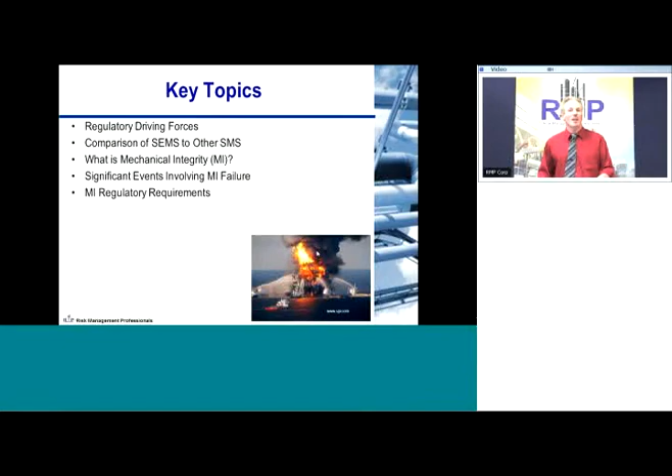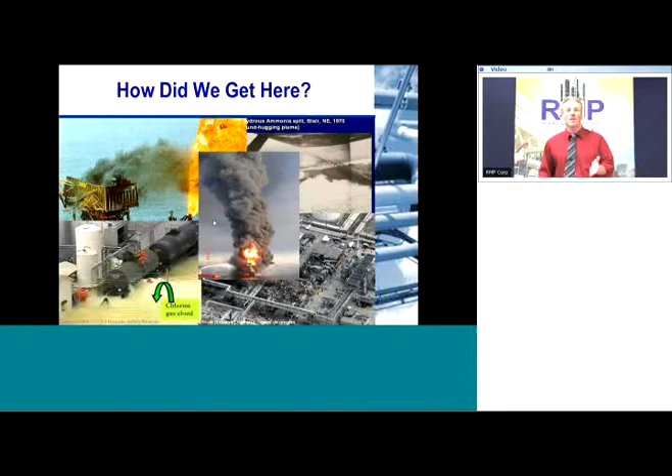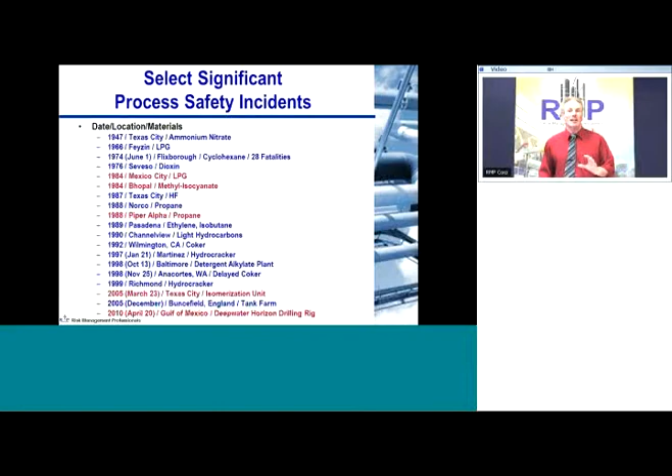I'd like to start out with talking about what's driving this. Basically, there have been a number of tragedies over the past decades that have really awakened safety professionals to the importance of their job and the need for good quality work and for very complete safety programs. When you look at a lot of the significant events over the past few decades, the items highlighted in red, 1984 Mexico City, Bhopal, India, 1988 Piper Alpha tragedy, 2005 Texas City, and last year in the Gulf of Mexico with the Deepwater Horizon accident. All these things were pivotal events that triggered the development of various types of regulations.

Again, what I want to do is lead up to an understanding of what mechanical integrity is, what the regulatory requirements are, and what are the resources you might have to very efficiently develop your program. One of the things to keep in mind is that mechanical integrity and a lot of these other elements of safety management systems come out from observations and investigations of previous accidents. I mentioned those four pivotal process safety events that have really driven the development of regulations.

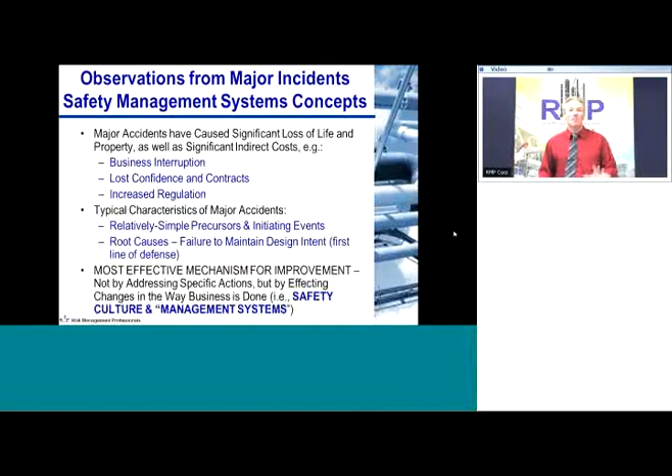When you look at all those different process safety accidents that have caused major business interruptions, lost confidence and contracts, increased regulations, when you drive down to what the root issues were, you realize that they're relatively simple precursors and initiating events. It's not a misunderstanding of the laws of physics, or radical new technologies that we didn't understand the effects of. Root causes were typically the failure to maintain the design intent. And a lot of that design intent is encompassed by the mechanical integrity program. So when you look at those failures, people realized the most effective mechanism for improvement was not really by addressing specific actions, but really by changing safety culture and the development and implementation of management systems.

I've been involved in this business since the mid-'80s, and I've also served on the technical steering committee of the CCPS at that time. And I've watched the development of various regulations, often as a result of tragedies, up to the current day when we're looking at offshore facilities and the SEMS program.

And when you look at the mid-'80s, when there was a technical management guidebook developed for managing process safety, and you look at the key elements there, and you look at what's in the SEMS program now, and also for onshore facilities, process safety management, and also risk management programs, you really don't see a lot of differences in terms of fundamental concepts, the fundamental elements that need to be managed.

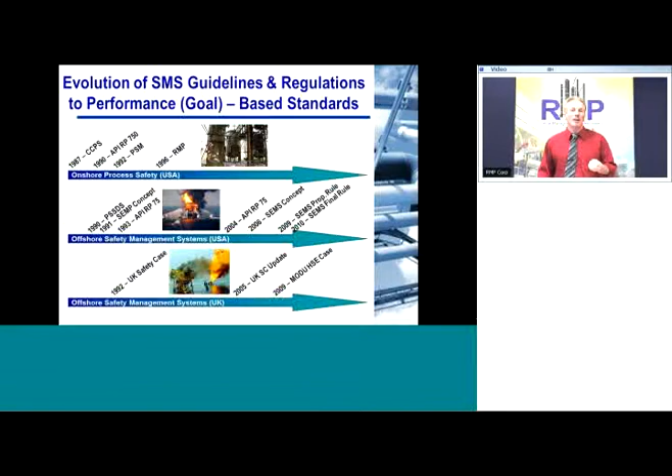And over that time period, you've literally had hundreds of safety professionals looking at that, and that relative consistency, even though there are differences in some elements, that general consistency of all those different requirements really hones in on the fact that these are fundamental elements for having a good program that manages safety. So what I'd like to do is make sure that there's a good understanding of how SEMS compares to some of the other programs that are out there.

When you look at the different SEMS elements, safety and environmental information, hazards analysis, management of change, operating procedures, safe work practices, training, mechanical integrity, which is what our focus will be today, pre-startup review, emergency response and control, investigation of incidents, auditing of the different program elements, and also documentation requirements. When you look at all those, again, these are very similar to the elements of other programs that are out there.

Doing a good hazards analysis to understand the basics of your needs for the programs. Managing change, because there's all sorts of things that are happening at a lot of facilities, and the importance of keeping control over that and understanding the impact of those changes. Operating procedures, so that you have consistent best practices in terms of how you operate those facilities, and also mechanical integrity, maintaining the functionality of key equipment, both equipment that's in normal operation and also equipment that may be on standby for key safety functions.

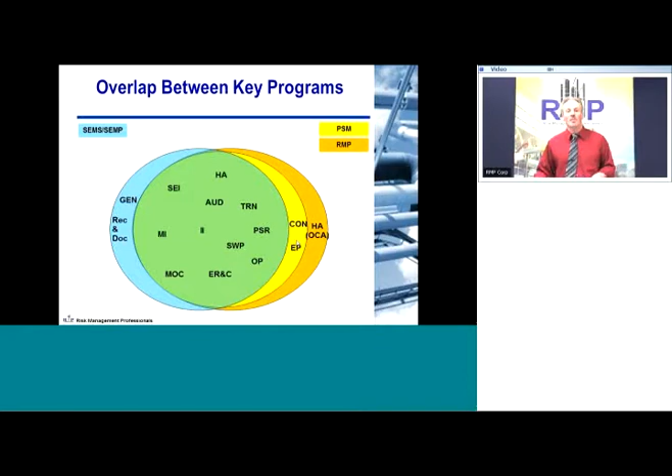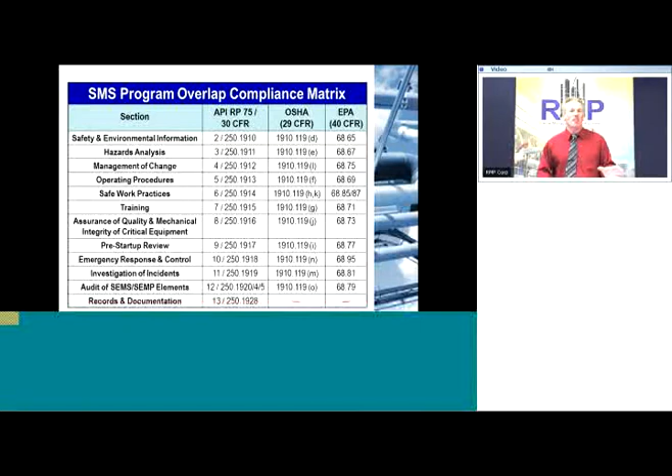So let's get to the meat of it. I'll be cycling back to why I was talking about that overlap in a few minutes. But let's get into some of the details for what is mechanical integrity. Just to make sure we're all on the same page, mechanical integrity from the Chemical Manufacturers Association, basically the fundamental premise was process equipment that is properly designed, fabricated, installed, and operated should provide reliable service if it is adequately inspected, tested, and maintained over the life of the facility.

The key thing there is reliability. You want reliability not only for your operating equipment to avoid process excursions, but you also want key standby equipment for safety to be functional when needed.

A lot of safety equipment just sits there forever, and people don't pay too much attention to it, and they really don't know if it works or not unless you're testing it or somehow verifying its functionality. And I'm now going to get into some examples of that.

I've seen some really interesting cases when I've been at plant sites and you walk around and you notice a key safety feature disabled in pieces on the ground, and you ask, oh, why is that device in pieces? What are you doing to it? And the reply is, oh, it's been like that for months. It never comes on anyhow, so we just figured we could leave it disassembled and keep it a low priority.

Whether it's active equipment or standby equipment, things that are critical for safety are necessary to maintain their reliability, and that's what mechanical integrity is all about. And we'll be talking a little bit in terms of ways to do that effectively, identifying critical equipment and finding ways to help manage the reliability of it.

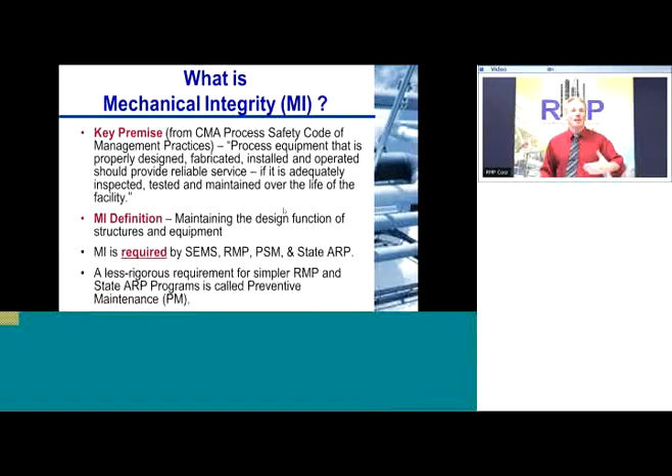Now, you'll also hear another term, preventive maintenance. Preventive maintenance is one element of mechanical integrity, and for some of the simpler onshore risk management programs and state accidental release prevention programs, that preventive maintenance requirement is a stripped-down version of mechanical integrity designed for simpler facilities that represent a lesser hazard.

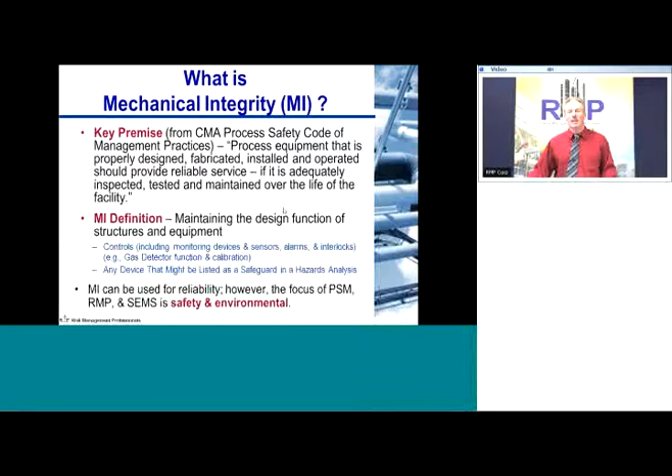Preventive maintenance, again, is a key component of mechanical integrity, but the other elements of that, not just maintaining and preventing equipment from failing, but also some sort of inspection, testing, and repair of equipment. Once it's out of service, how long can it be out of service before it's repaired, and how do you repair it safely? All those are elements of mechanical integrity. Mechanical integrity can apply to any type of device or structure. I'll tell you how to identify those in a few minutes.

However, for regulated facilities, things that tend to come into these programs frequently are tanks, pressure vessels and piping, blowout preventers, pressure relief systems, emergency shutdown systems, rotating equipment, various control devices, and also active and passive protection features, and really any device that might be listed as a safeguard in a hazards analysis. That's one of the key indicators for what you need to cover by your mechanical integrity program.

If you've done a hazards analysis, a lot of people use the HAZOP approach for that. And if you need any background on that, we've got recordings of previous webinars on hazards analysis that we can send to you. Those exercises, the HAZOP study that lists the safeguards, if you've listed it as an important safety function, certainly you need to somehow assure its reliability.

If you've identified an initiating event as something that can trigger a potential process upset that causes problems, certainly that needs to have some sort of pedigree associated with it and somehow be encompassed by your mechanical integrity program. That doesn't mean that all equipment and all items need to be addressed with the same priority, but you'll want to understand the importance to safety of that device and your programs for maintenance, inspection, testing, and repair around that.

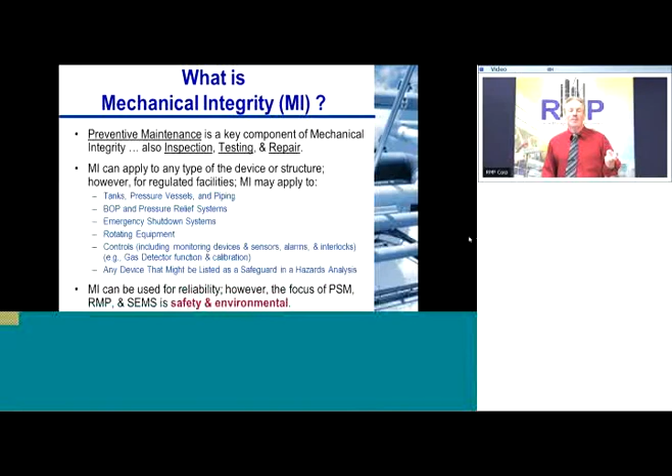Mechanical integrity can also be used to improve the reliability of your facility and, of course, operability and profitability. However, the focus of all these different safety programs and what the regulators are looking for, of course, PSM, RMP, and SEMS, is the safety and environmental issues.

So let's talk about some examples of mechanical integrity problems that have occurred and the sort of things that people look for. When you're looking at different events that have involved mechanical integrity failure, many of these basically have caused the formulation of safety management systems regulations, and a lot of these failures have been rooted in mechanical integrity snafus, if you may, things that haven't gone right, deficiencies in the program, vulnerabilities with respect to how people have applied these best management practices. And when you look at these accidents, not only does it give you an example of the importance of mechanical integrity, but also the kind of things that can go wrong at facilities.

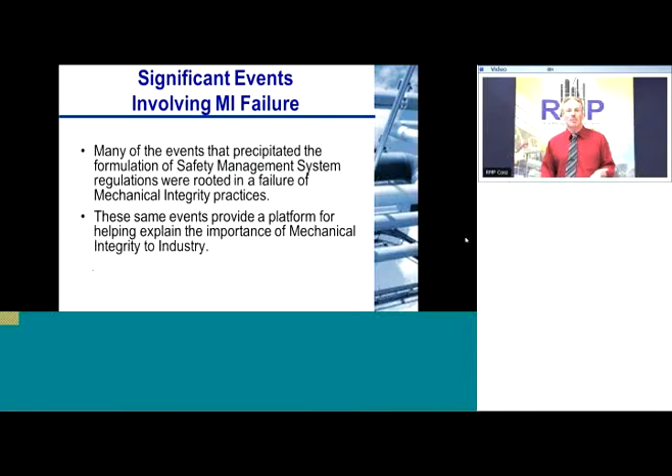When you look at the Flixborough event in 1974, basically it was a temporary bypass that was fabricated in the plant, never designed for that service with the temperature and pressure environment and the thermal cycling associated with the reactor. And there may have been some alignment issues associated with its installation. All those things contributed to the fact that it was not suitable for service, and eventually it did fail and resulted in 28 fatalities.

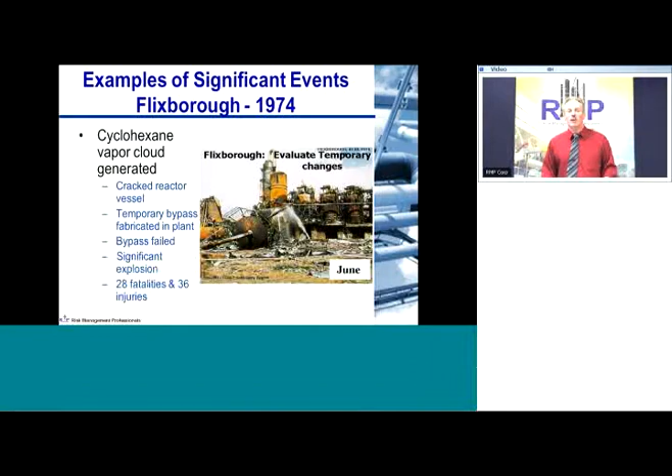When you look at a lot of the tank fires that have occurred over time, a lot of them are rooted in the failure of the level indication systems and also the safety alarm systems, a fundamental thing that would be covered by a mechanical integrity program.

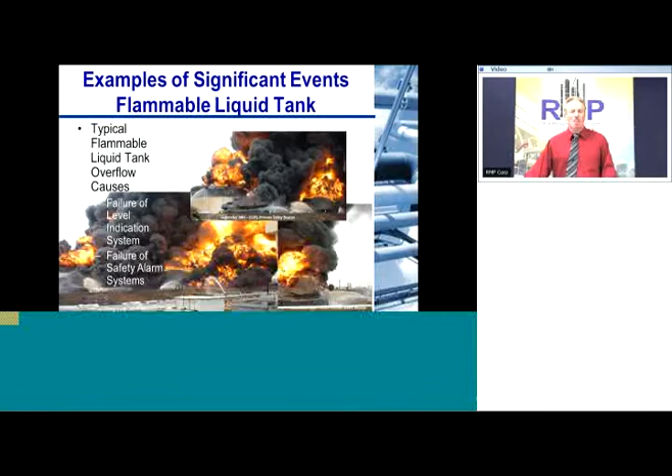When you look at the Texas City event in 2005, again, level instrumentation. Well, there are a number of things that were done that were contrary to good startup practices for that unit. But with respect to mechanical integrity, you've got alarm failures and also level transmitters coupled together, and again, hinged on mechanical integrity. And Texas City is a good example of many major accidents.

And it's not just one failure. It's one mistake, perhaps, that's done at the same time that something else isn't working properly, or several things not working properly, coupled together that can lead to a catastrophic event. And in this case, there were 15 fatalities associated with that.

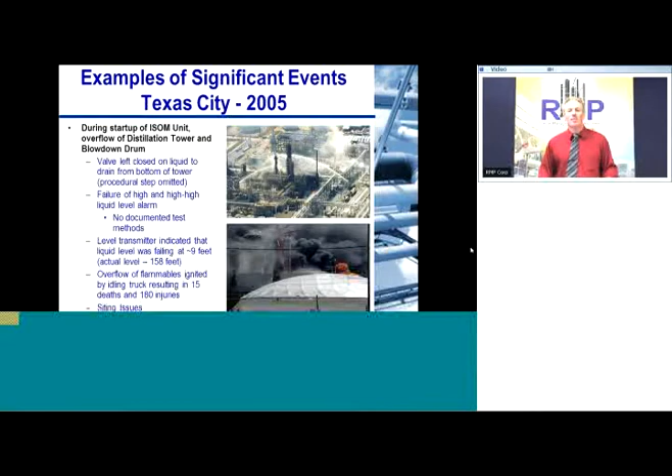Deepwater Horizon resulted in 11 deaths last year. Also, there are a lot of things that have come out with respect to the functionality of blowout preventers. Again, cycling back to the importance of mechanical integrity programs.

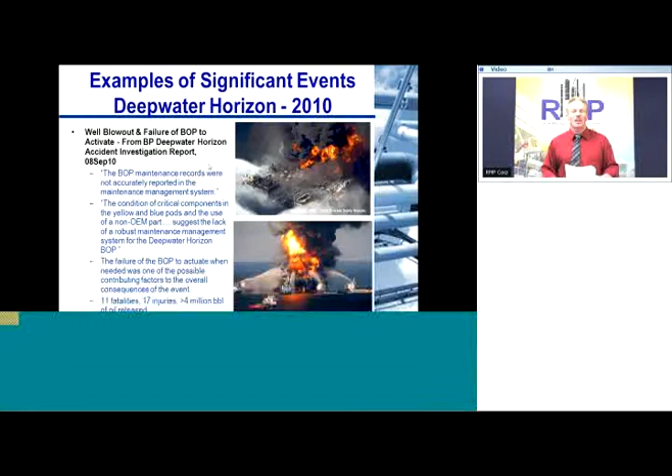So let's look at the regulatory requirements for SEMS. We looked at the SEMS pinwheel a few minutes ago. Mechanical integrity is in the lower left at the 7 o'clock position. Basically, you've got a key element that's incorporated by SEMS, and the specific requirements are spelled out there in 30 CFR Part 250, Section 1916.

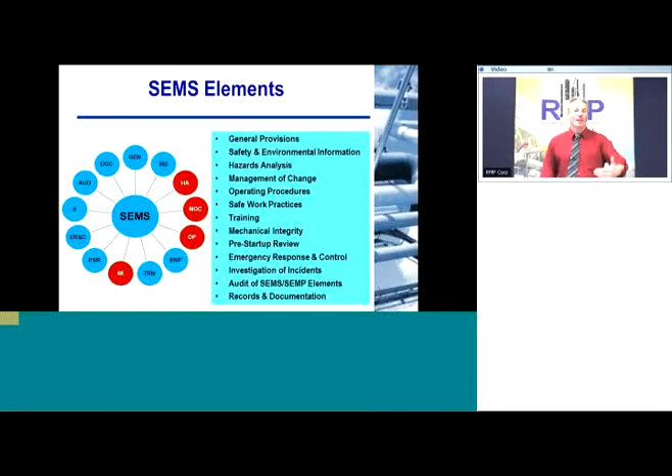Basically, those key requirements, and there's a lot more detail there that you'll want to be at least aware of, but the key requirements are to establish and implement written procedures to maintain the integrity of equipment. A lot of really powerful words here. Establish basically means the responsibility to put it together.

Implementation is don't just put it together and put it on the shelf. It's something that's got to be implemented, functional, and we'll be talking shortly about auditing your program to maintain the ability for it to do its intended effect. Written procedures. It's got to be written down.

In my home, I don't write down all my maintenance activities. There's a lot of things that go wrong, and I just deal with it when it happens. That's my own house and my own choice. It's not a process facility that can have catastrophic consequences and can potentially severely injure or kill various people and have a significant impact on the environment.

For process facilities, it's got to go way beyond informal practices and be written procedures to maintain the desired functionality of that equipment. Also, as part of the program, training is required. You've got to make sure you train maintenance and inspection personnel what to look for, how to maintain it safely, again, to maintain that desired functionality.

Inspections and tests have to be performed on process equipment. It doesn't say test every equipment every day. You've got to define, based on the reliability and experiences of the equipment, how often to test, how often to inspect, and again, SEMS is a performance-based standard, just like PSM and RMP, and it's the objectives that have to be met by the process facility operator and anybody else who works there, including contractors. Talk more about that later.

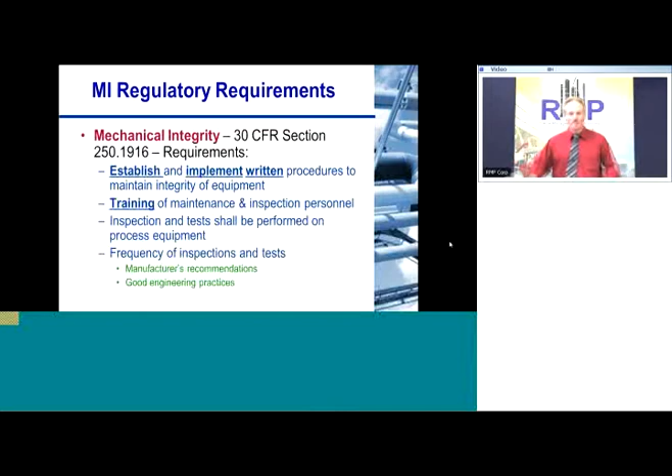Looking back to Part 250, Section 1916, again, the requirements include documentation, making sure there's an ability to identify and correct deficiencies outside acceptable limits. And also having a quality assurance program, making sure fabricated equipment is suitable for the process applications, performing checks and inspections to ensure installation and consistency with design specs and manufacturer's recommendations, and ensuring that maintenance materials, spare parts, and equipment are suitable for their service.

That's also encompassed by management of change. A lot of these different management elements overlap. Management of change: if you're changing and putting in different pieces of equipment or different subparts to a component, you need to make sure they're suitable for their service.

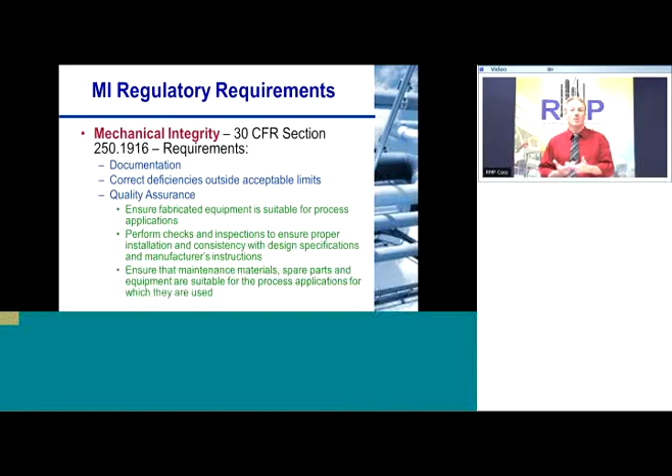Now, there are various regulatory requirements out there that help do that. I've listed a lot of the key API requirements. A lot of them apply directly to SEMS and also the offshore environment and specific offshore equipment such as blowout preventers, surface and subsurface safety valves, etc. All those regulatory requirements are out there. And also you'd want to add to this list API Recommended Practice 75, which is the SEMP program that's referenced heavily by the SEMS requirements in 30 CFR Part 250.

A lot of this hinges on recognized and generally accepted industry standard governing documents. Regulatory requirements aren't going to reinvent the wheel and tell you you need to apply every document, every regulatory requirement to this and that. And in this case, a lot of these are recommended practices and not specific regulatory requirements. But this and also the RAGAGEP generalities in PSM and RMP, which are recognized and generally accepted good engineering practices, all hinge upon the fact that the regulators expect you to understand the best practices that are out there and make sure that you're consistent with that.

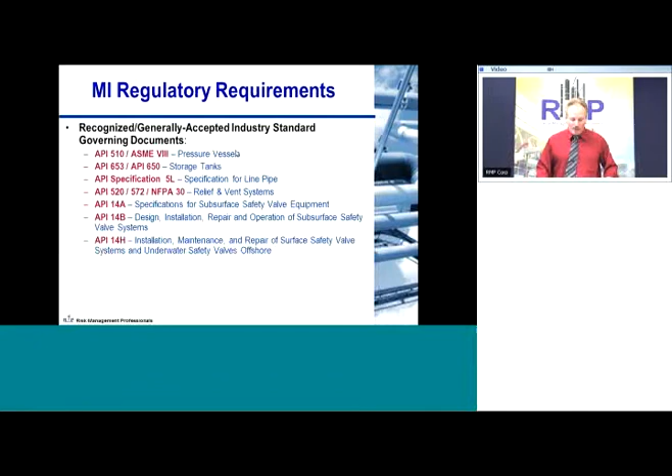Does that mean you need to apply every recommended practice? No, but you ought to be aware of what's out there and make a conscious decision of what applies and what represents good applications. So let's talk about some of the key elements. What's part of the program and also how do you formulate it effectively?

The first thing you want to understand is what are the key responsibilities. The person in charge of the program, often the safety coordinator, SEMS coordinator, a lot of people have different responsibilities and different titles in different companies, but there's a responsibility to ensure that there's an established and implemented written procedure to maintain the ongoing integrity of process equipment. Each employee and contractor involved in maintaining that has to be given an overview of the process and its hazards and ensure that the person can perform the job task in a safe manner.

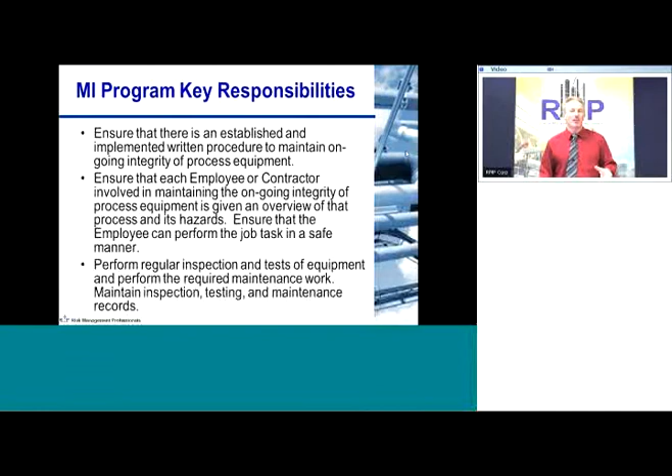There also have to be regular inspections and tests of equipment and performing the required maintenance work. And also maintaining inspection, testing, and maintenance records. All those things are fundamental responsibilities for maintaining an active and healthy mechanical integrity program. When you look at the program itself, there's a lot of different things that you need to consider. You start with requirements. What is really necessary? Identifying the critical equipment can come out of a HAZOP study. It can come from a lot of different places.

Once you've identified what the requirements are and dug up OEM requirements for testing, inspection, and maintenance, you need to manage the program. You need to develop procedures to help you manage it, train personnel to make sure it gets done properly, perform the inspections, tests, maintenance, and repair activities in a safe manner that assures the necessary or desired reliability of equipment. You need to have documentation for what's being done, and also a feedback loop. What are you actually experiencing out there? What failures have occurred? What types of failures, and what would have been their impact? So you can cycle that back into the program.

So this whole thing is a loop. It's basically not a static activity. It's not an activity that's isolated from other SEMS elements, but it's something that is an ongoing, evergreen activity that cycles to maintain its health.

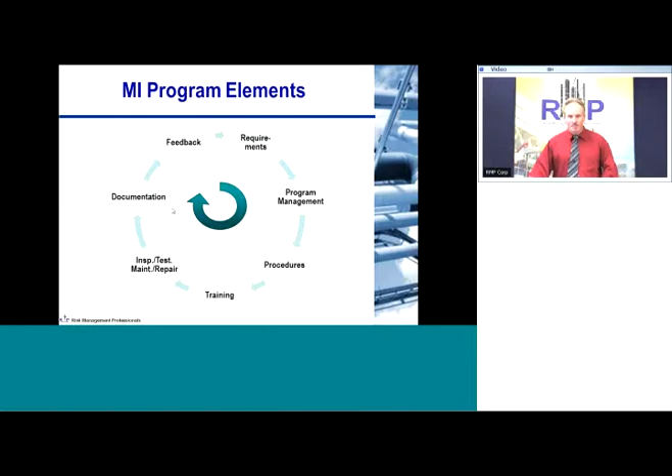And also, by cycling it and using that feedback and what the experiences are at your facility, you can often impact the requirements in a way that helps you focus your program properly. This just lists out the different program elements.

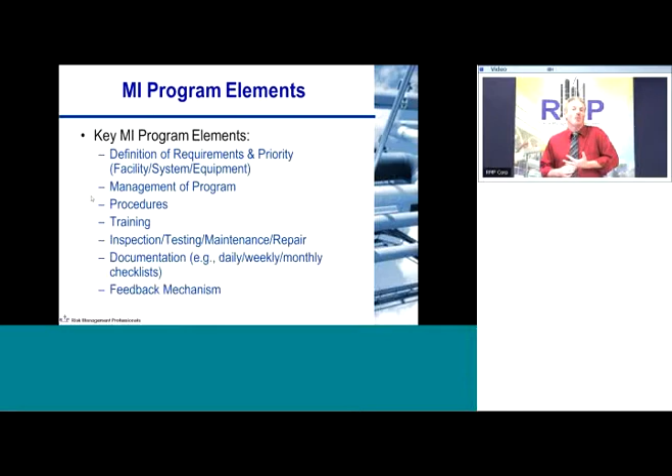And the next thing I'd like to talk about is basically formulating the program. Again, typical equipment that you include are pressure vessels and storage tanks, piping systems, blowout preventers, relief vent systems, and other devices, emergency shutdown systems, various controls, automatic protection features, valves that may initiate an undesired process excursion, and also if you're getting a release of materials.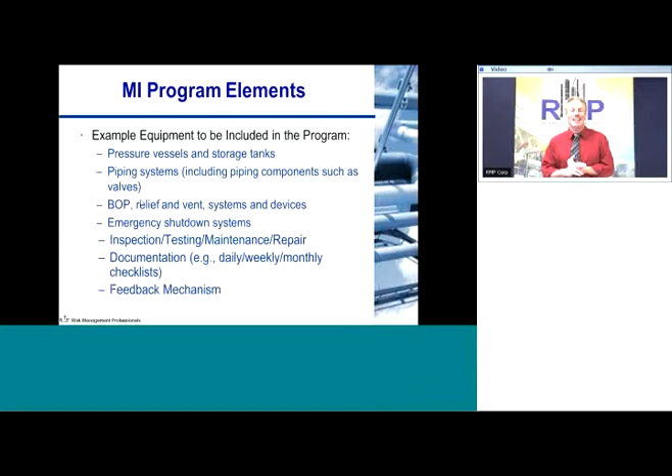Do you have gas detectors? What is their function? Are they calibrated? How do you verify that they're going to function the way they are intended? A lot of facilities that have gas detectors haven't made that a priority, and my understanding is that there tends to be a very high frequency of failure when people actually go through not just testing the calibration of the detector, but looking at what the functions are and do they occur properly. Also pumps, other rotating equipment such as compressors, all those may be key portions of the program.

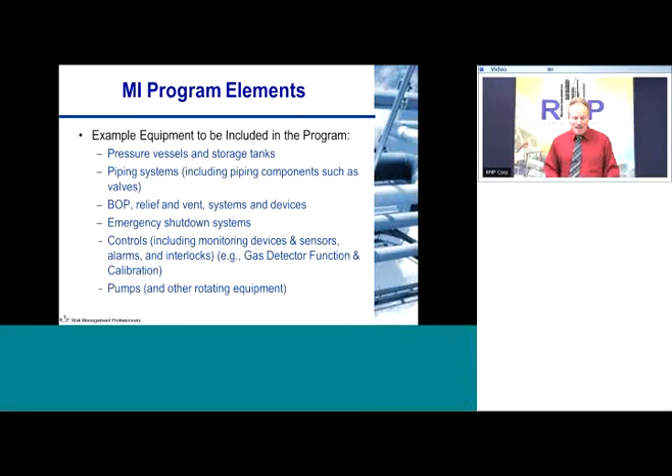When you're formulating the program, again, you want to start with industry best practices and adjust the testing and maintenance activities and frequencies based on field observation. There may also be types of tests that aren't needed based on what your experiences are with respect to equipment reliability. Equipment manuals and suggested maintenance tasks and frequencies are included. And as I mentioned before, the hazards analysis and LOPA, safeguards and the causes can identify critical safety devices.

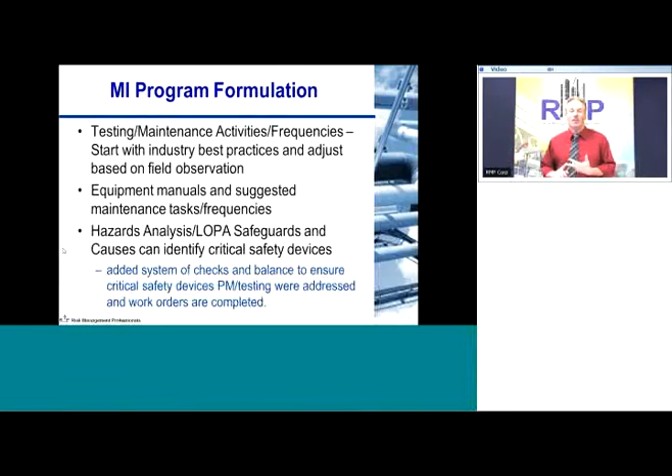Now, when you're looking at formulating the program, there's a lot of things you can get from the equipment manufacturer. For compressors, for example, you get a variety of things to check on a daily, weekly, monthly, and annual basis. And those are the kind of things that you'll want to track in the mechanical integrity program. Again, it's an evergreen process, and a key part of the program are reminder systems and work order generation to make sure these things happen.

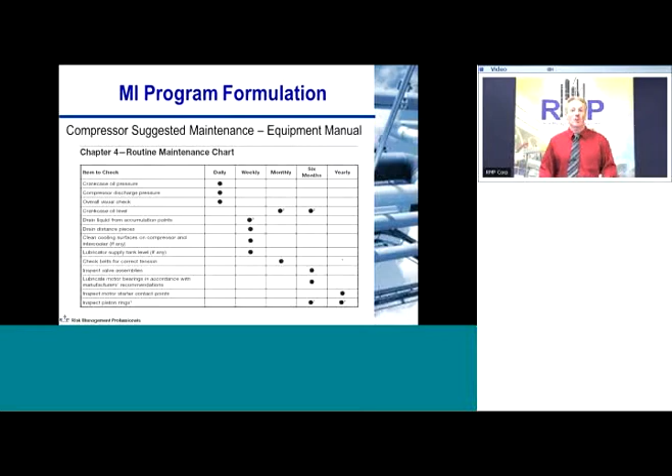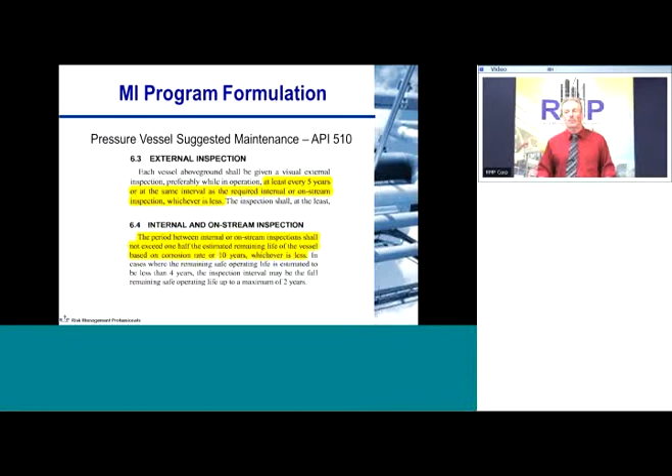When you're looking at vessel suggested maintenance, I mentioned API recommended practice 510 before. There may be external inspection requirements. A lot of people do it every 5 years, and also internal and on-stream inspections at less frequent occurrence. API 510 also looks at pressure relieving devices, and basically most people do a 5-year test and calibration of the relief devices to make sure they're properly functional. A lot of times, depending on the size of the device and how readily it can be replaced, a lot of people just replace them on certain frequencies.

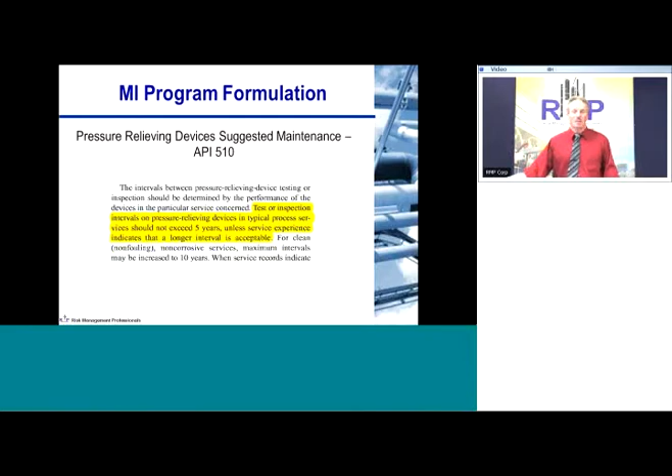When you're looking at blowout preventers, this is just an example of a specific manufacturer's recommended maintenance practices for the packer, lip seals, and also getting into the BOP, disassembling it, verifying its functionality, and also opening and closing it to verify that its intended function actually occurs. And when you're doing this, you want to use, as I mentioned before, not only the manufacturer's recommended practices, but also correlate that to various API and other industry recommended practices.

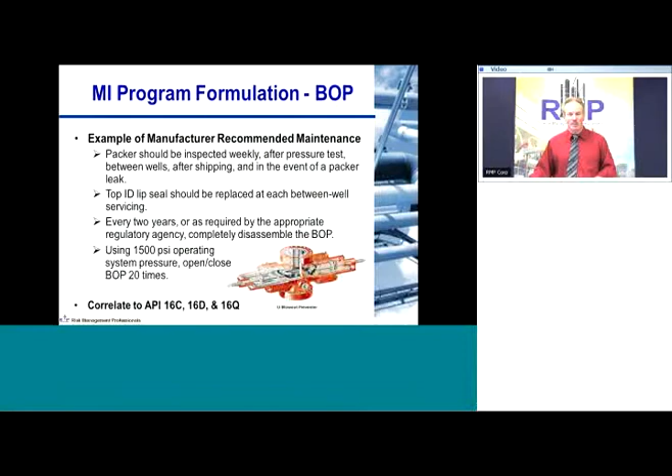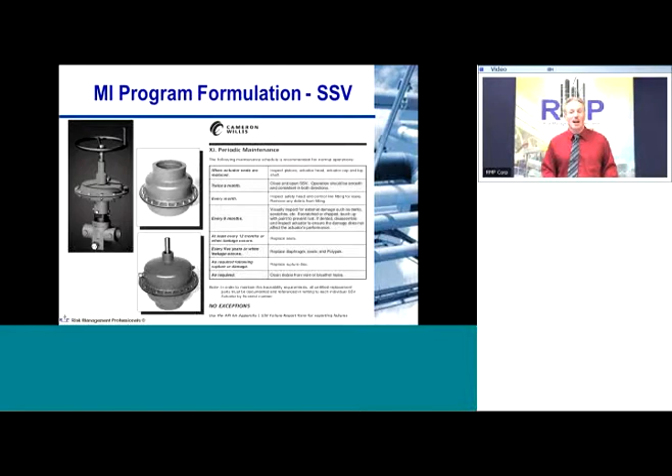When you're looking at surface safety valves, those come with specific inspection points on a periodic basis. In this particular case, they have guidance on what to do twice a month, every month, and so on and so forth. There's also various API requirements for looking at surface safety valves. 14B and also 14H take a look at SSVs. So all these things are out there and available to supplement your knowledge base and how you're formulating your mechanical integrity program. Now, chances are most of you guys out there are already doing most of this.

In the past, a lot of it's been done informally and without a lot of documentation. What the mechanical integrity program that's part of SEMS is doing is really trying to take those best practices, putting a structure to it so that it's implemented a little bit more reliably to ensure the reliability of equipment, and also to make sure it's across the board. People are addressing things in a relatively consistent manner and in a way that BSEE can do their job in terms of enforcement and inspections.

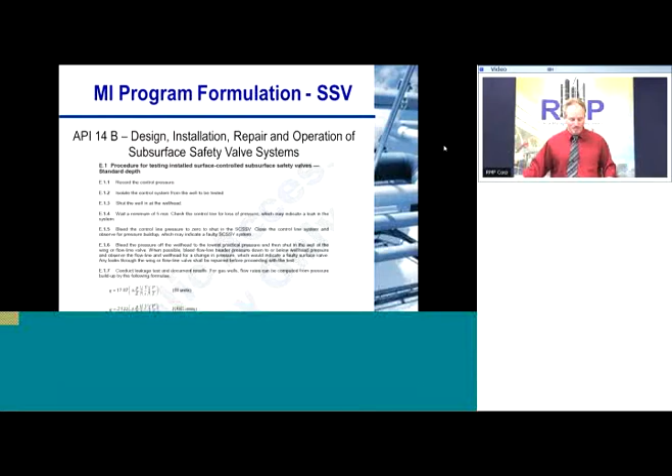So when you're looking at the formulation, again, you're going to want to use your experiences to feed it back into the process. If you get premature failures, if you get a piece of equipment that, sometimes you just get a lemon that's got certain types of failures that occur all the time, you're going to want to factor that into your mechanical integrity program and find a way to make sure that you inspect it and test it and make sure it does its intended function in a reliable manner. And in particular, isolation valves are very important. Not only testing it, sometimes people do a partial stroke test, but also general verification of functionality.

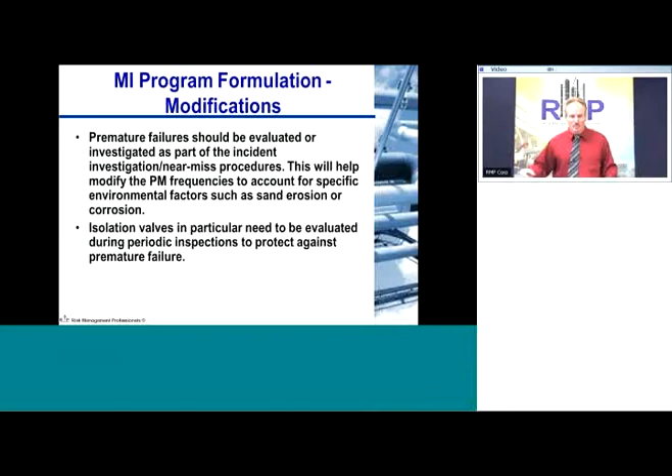So once you've developed the program, and as you're implementing it, one of the things you need to do is monitor the health of the program, monitor its implementation, and also correct any deficiencies that occur. So what I want to talk about is those monitoring elements, how you audit your own program, what to look for, what sort of things have caused problems in the past. And also, I've got some insights from an agency representative who worked with us on another webinar that I'd like to share with you as they've gone through and have been monitoring the implementation of the SEMS program for facilities

in their jurisdiction. So the key thing in terms of monitoring elements, you want to have key elements that you're looking at. Is everything properly covered? Have you covered in your mechanical integrity program all the critical equipment? Have you determined requirements for procedures, testing, training, inspection, maintenance, and quality assurance? Are you efficiently scheduling resources? If you don't make good use of your resources, you may have a program that's really unworkable.

Mechanical integrity programs are very easy to audit, and it's easy to find deficiencies. An auditor, a regulator, or your own internal auditing staff from corporate can come in and say, okay, let me look at your HAZOP study. In there, they can pick some key safety features such as a PLC, such as an automatic isolation device, and say, all right, fine, show me the mechanical integrity program for this device. Then they can look at inspection records. So they can take it all the way from a very specific definition of requirements to inspection records.

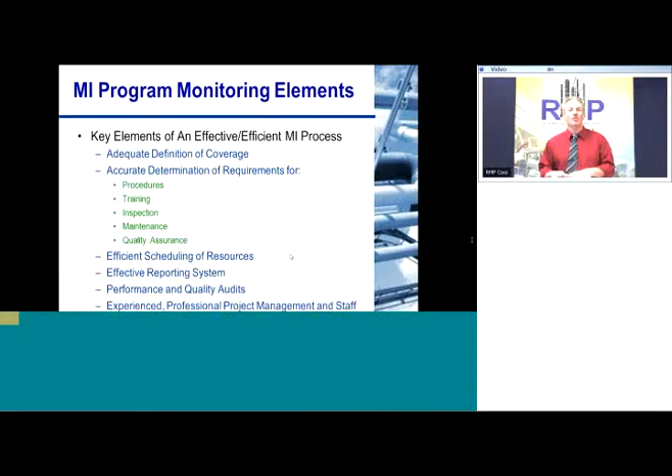And a lot of people have trouble keeping up with these programs, not only getting the maintenance done, but also documenting it. And because it's so problematic and it's easy for things to slip through the cracks, that's why it comes up pretty high on the citation list too. So these are the kind of things you want to make sure that you efficiently schedule resources and manage very carefully, because it's very easy to have deficiencies in your mechanical integrity program. You also want to have a good reporting system. Make sure you have performance and quality audits, and you want to make sure your project management and staff are sufficiently experienced to get the job done.

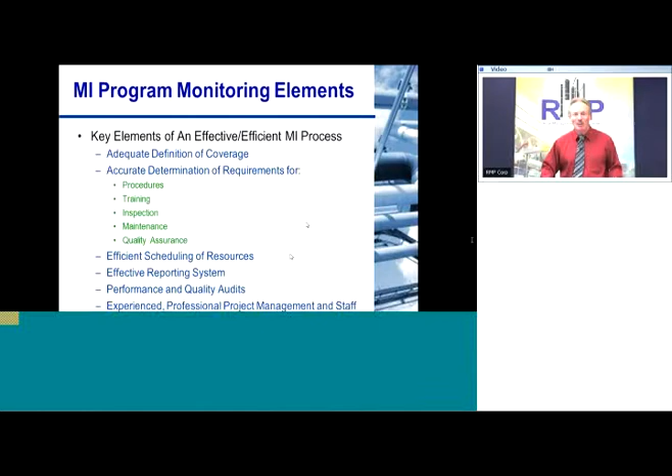Sure. Does this work better? Okay. No. Okay. Was it coming through weak? No. Oh, okay. I'm too animated. Well, actually, I guess I had my coffee this morning.

Okay. Let's talk a little bit more about monitoring. Also, as part of the monitoring program, you'll want to make sure you're looking at documentation, that there are written procedures for identifying the systems that are necessary for mechanical integrity, the methodologies, how you're inspecting it, how you're training, how you respond to maintenance and repair issues. What are the reporting systems? Is everybody aware of how to report, who to report to, and does your maintenance department consistently use a work order process or some means of documentation to generate the need for maintenance, make a decision what priority and how quickly that maintenance needs to occur. Also, there are various system and equipment information packages that provide system identification and various supporting documents.

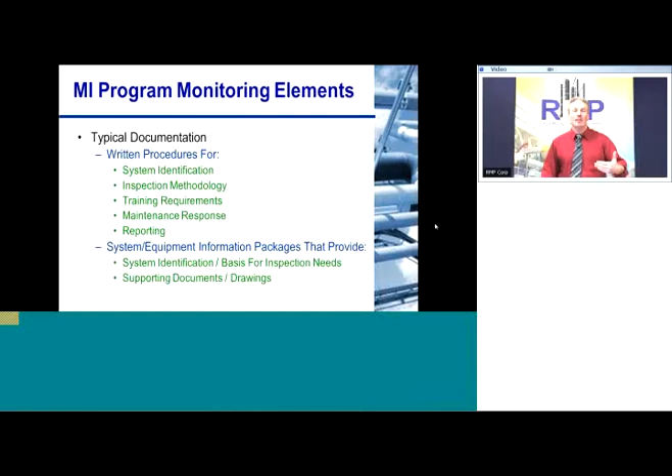So let's talk about general approaches to an audit. Again, the challenges are that these are very large requirements for complex facilities, and for complex or larger facilities, the breadth of the program is really significant. You've got a lot to do. Key objectives of the audit have to be to first define the requirements and priority for what you're doing, and make sure those requirements are defined in the mechanical integrity program.

And you want to look at how the program is managed. Are the procedures followed? Do they exist? Are they complete? Do they address not only the reliability of the equipment, but also the importance of protecting the safety of maintenance personnel? Is the training adequate? Again, training to make sure the maintenance personnel do their job properly and can do it safely. Performing inspection, testing, maintenance, and repair. Frequencies, how to do it, exactly what needs to be done, and what represents a success.

If you're testing something, if a valve closure is off by a fraction of a second, is that really an issue? Do you need to implement some sort of maintenance, or is that acceptable?

Documentation. Following through with the documentation is a key snafu. I've gone to lots of facilities. I know they're maintaining it. I know the people who do the maintenance, and sometimes they don't do the best documentation, but that documentation has to be done. Those are citable items when a regulator comes through and audits your program. So when you formulate your own internal audit, those are also very important to do.

The feedback mechanisms, how you actually get the program working and get information into the program. And also, you may need general other expertise, contractors to do special maintenance requirements, and also interfacing with corporate offices. That interface is important to define and also make sure it's working properly. So the key objective for your audit is to gauge the mechanical integrity program effectiveness.

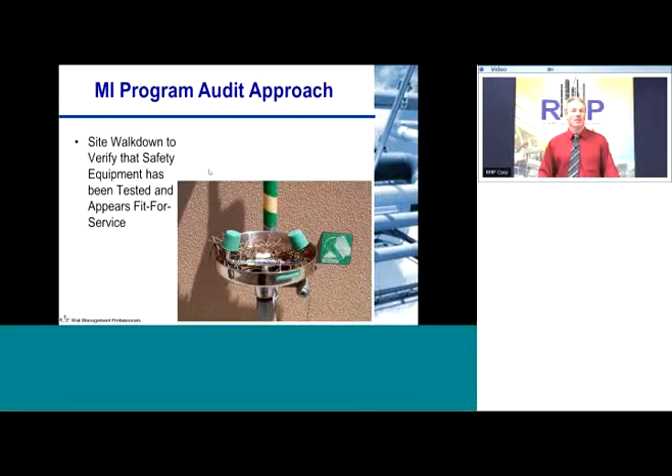I worked with a refinery manager years back, and one of the things that he did as part of his job, he just got there early in the morning, around 5:30, 6 o'clock, and he'd pick just one unit and go do a little walk down every morning. Right at dawn, as part of his morning walk, before he got sucked into all the other things that were part of his job. And it's that hands-on, visual approach, actually looking at the overall health of the facility, that can be really important.

So what sort of things have got people in trouble before? Let's talk about some common deficiencies. Written procedures not complete or not implemented. That's straightforward. It's an easy trap to fall in. Inspections and maintenance not occurring on the frequency that's defined, or they're not being done consistent with industry standards or best practices. Not corrected in a safe or timely manner.

I mentioned to you about the standby safety equipment that was in pieces when I went over to the plant site. It needs to be defined how long something can stay out of service before it's unacceptable. That's got to be part of your program for standby equipment.

Facilities that rely on a contractor and just say, oh, Joe comes in here every 6 months and does some stuff and then maintains our equipment, that just doesn't cut it. You need to know what the contractor is doing, and you want to keep duplicate copies of the records, because ultimately as the facility operator, you have responsibility for making sure that the mechanical integrity program is properly implemented.

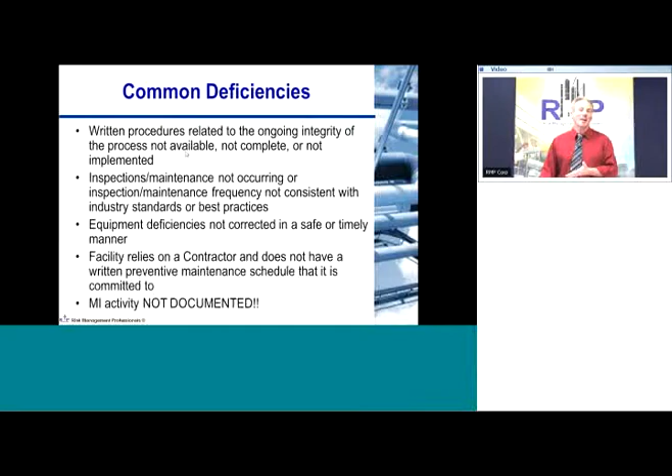And documentation. If it's not documented, most agencies will consider that it didn't occur. And if it didn't occur, that's a citable item. Good documentation for the mechanical integrity program. There's a lot to it. There's a lot of things that can help you out there with respect to computerized maintenance management systems, but not documenting that activity can get you in a lot of trouble.

Let's talk about some things. These are some slides from a similar seminar that we did about a year ago on the SEMS program when SEMS was first being implemented. And these are some agency insights from the California State Lands Commission's oversight of the Safety Environmental Management Program for several offshore facilities on the West Coast.

Basically, the most critical mechanical integrity elements that they found were testing and PM of safety instrumented systems. Basically, all the items that show up on a safe chart, making sure that there's testing and PM requirements. Also looking at emergency support systems, lower explosive limit gas detectors, thermal flame and smoke fire detection systems, fire loop detection and suppression, spill containment features, emergency shutdown, and also subsurface safety valves.

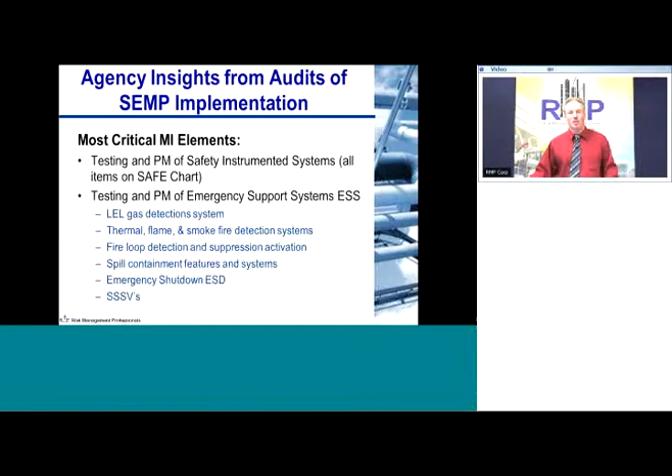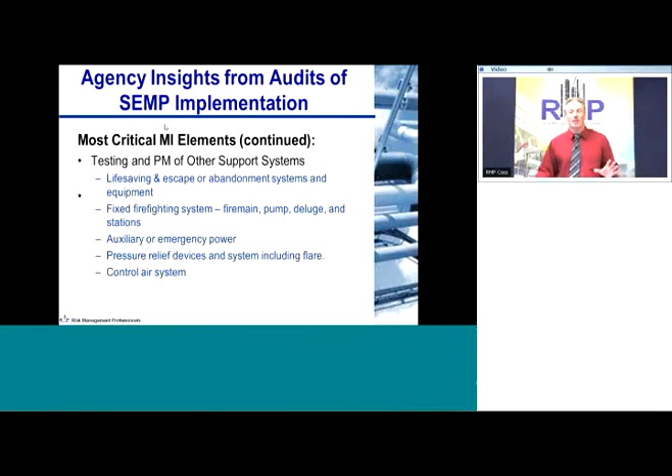Other support systems, life-saving and escape or abandonment systems for offshore facilities, fixed firefighting systems, auxiliary or emergency power, pressure relief systems, and control air systems. These are all things that were considered very critical that need to be looked at.

And as I mentioned before, these are tough programs to keep up with. There's a lot of different elements. There are also various peaks where a lot of things need to be done. Also some unexpected activities. The mechanical integrity program doesn't always have everything that you can plan weeks and months in advance. You have turnaround activities that you can plan that represent peak activities, but you also have equipment that fails and involves your maintenance department in various repair activities.

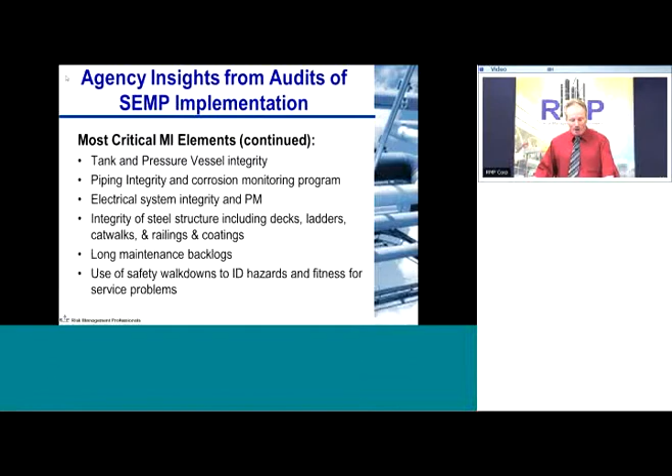So those sort of things, if they're slipped a couple of times, it's not going to be a catastrophe. But if you've got a chronic backlog for your maintenance department, that's something that is observed and has been cited before for offshore facilities. Also, use of safety walkdowns to identify hazards and fitness for service problems are things that have been identified in the past as concerns.

Now, one of the key insights from their SEMP program implementation and oversight is that the computerized maintenance management systems do help build and tie together the programs. It also allows the agencies to have a really good feeling that things are getting done as part of the mechanical integrity programs. It can help you monitor the backlog for getting to these various work orders. These required test inspections need to get done on the required schedule, and a computerized maintenance management system can help out. What they found is the folks who do embrace this get on top of it, at least management knows when things aren't happening, and you can manage your mechanical integrity program a lot better.

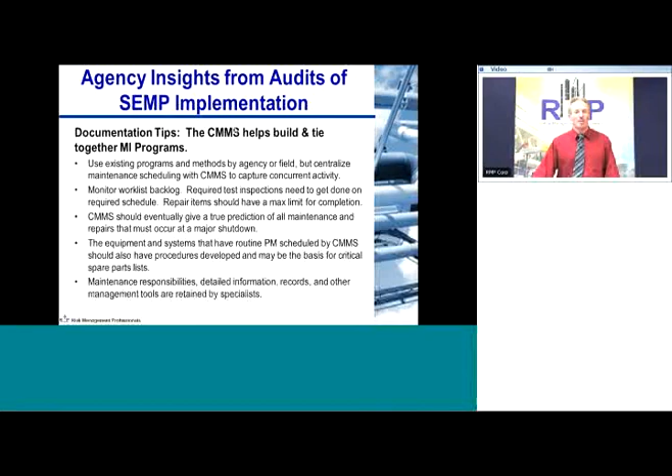The CMMS can give a true prediction of maintenance and repairs that must occur at a major shutdown, and also it can help you formulate a critical spare parts list. Maintenance responsibilities, detailed information records, and other management tools are readily there. A lot of people can take a look at it, and it can really help you understand if your program is healthy and things are getting done properly, and it does help things get done a little bit more smoothly. So let's talk about implementing in a sensible manner.

There have been lots of ways people have implemented mechanical integrity programs in the past. On the left are things that are informal and at this point totally unacceptable. They were easy, they didn't involve a lot of documentation, but if you're managing a process facility that falls into SEMS or any related safety management system programs, you just can no longer rely on people's memory, post-it notes, or just scribble marks on a calendar. You've really got to have something more substantial.

Does that mean you have to do a computerized maintenance management system? No, you really don't. SEMS is a performance-based requirement, and you can use some sort of documentation. You can do it all in writing if you want to. Computerized maintenance management systems are merely designed to help get the job done, and as the agencies have noticed when they monitor the implementation of SEMP for various facilities, it helps it get done more efficiently so you can actually adhere to the requirements of the program.

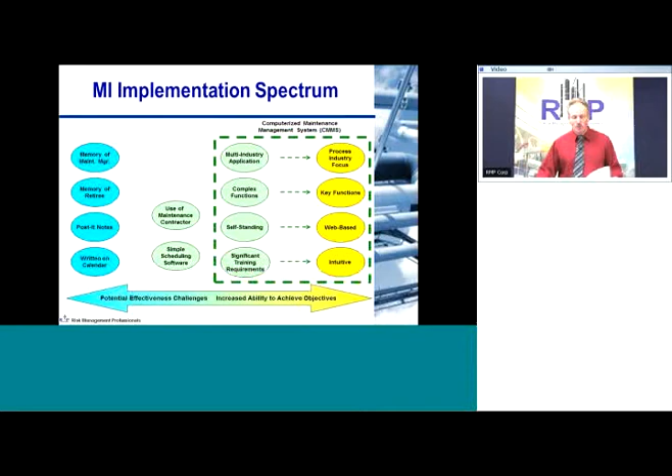Now, a lot of CMMS in the past have been very expensive, training intensive, and also required a lot of specific hardware. A lot of the better systems now that are out there are web-based and fairly intuitive and require really minimal training. When you're looking at these different implementations, again, you need to look at functionality.

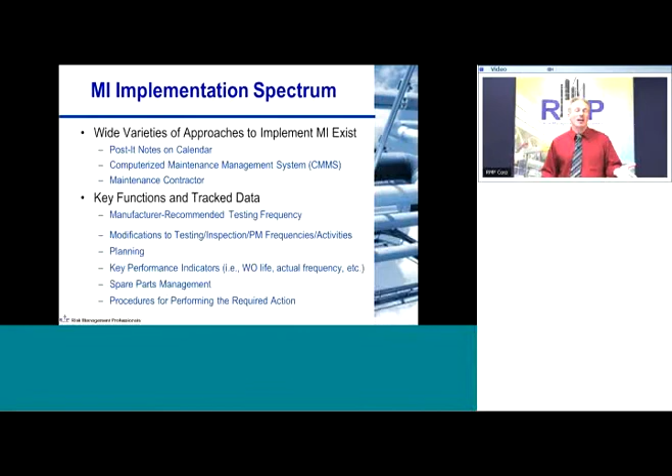Whether you're doing it in writing or using a computer program, you need to make sure that key functions and data are tracked. The manufacturer recommended testing frequencies, inspection frequencies, and PM frequencies, logging this information, logging observations, procedures for performing the required actions, making sure work orders get done, and as part of the work orders, safety precautions, parts needed, all those things are necessary for keeping your program healthy and need to be part of your implementation of the mechanical integrity program.

And don't forget to monitor the program. You've got to have performance indicators, actual frequencies of failure, how the work orders are being implemented, and some sort of trigger points that tell you if the program's not working properly and your maintenance department is getting severely backlogged. Yes, the maintenance folks will complain if they're overloaded, but don't just count on qualitative complaints to tell you if your program's working properly. You want to look at the records, look at the magnitude, look at how things slip, and what's slipping. How important is it?

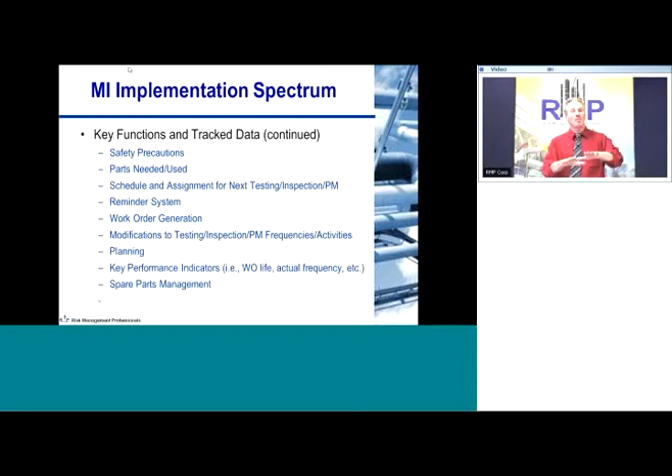And also, is your maintenance department focused on things that may not be safety critical? Are they spending a lot of time dealing with very simple issues that don't have any impact, that really don't need to be part of the SEMS program in the first place? Whether it be a written program or a CMMS, you want to have some ability to distinguish between those two. So that talks about basic implementation requirements and what needs to be on there.

But just remember, there are a lot of different computerized maintenance management software packages that are out there, and there's a lot of good ways to get the job done. And we'll talk about some interface issues with corporate and other business arms that you may have in your company, and maybe some additional resources that you've got inside your own companies.

So let's talk about general tips on making your program effective in terms of its implementation. First of all, best practices are where you've got organizational and internal accountability. Basically, SEMS tends to formalize that and make sure somebody's assigned to these programs as a person in charge to get the job done. Availability of equipment specifications. Good availability helps you meet the intended requirements. Clear definition of those requirements. Use of software for tracking generation of work orders, documentation, and records retention also helps you get the job done.

Things that don't work anymore are fix-it failure maintenance strategies. Well, let's put it this way. It doesn't work for everything. One of the things you need to do as part of your mechanical integrity program is prioritize stuff.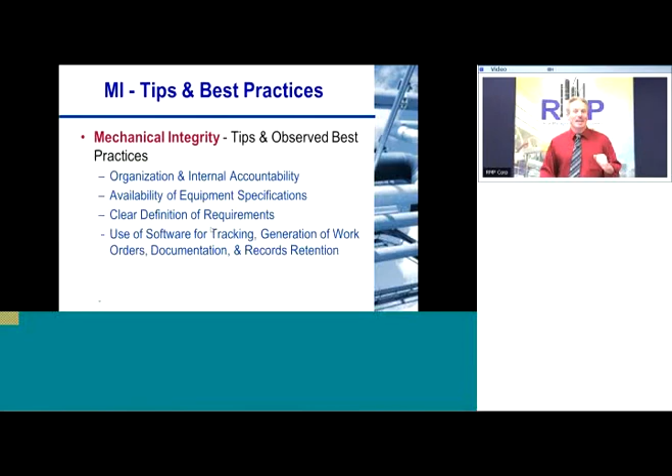If you've got your maintenance department spending a lot of time on maintaining non-safety critical equipment or equipment that doesn't need to be part of SEMS, have a mechanism for putting that on a separate list of things that can be done on a casual basis or as filler activities for your maintenance department, and prioritize the things that are part of key safety impact scenarios, maybe for your HAZOP study or other types of hazards analysis, and focus on those items from both the timing perspective and how much effort you put into it.

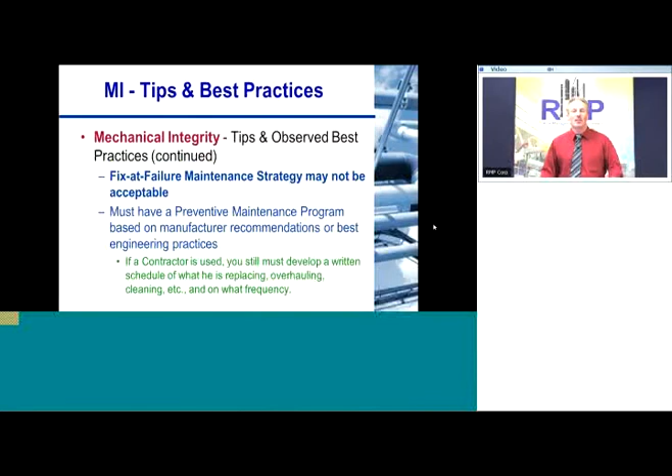And again, your preventive maintenance program has to be based on manufacturer recommendations. Even if you've got a contractor doing things, you have to have a written schedule for what they're doing, and it really needs to be subsumed as part of your program.

So a quick summary is mechanical integrity is an important issue for managing health and safety. It shows up at the top of what gets people in trouble, and also very close to the top of a lot of key root causes of key tragedies that have resulted in loss of life and severe environmental impact. Therefore, a high quality and formal, it's got to be written and formal, mechanical integrity program is a key element for any safety management system, including SEMS.

It is a challenge. There's a lot of work required. It can't be done informally anymore. And it's also an important audit element for your own internal corporate audits, your own internal audits for looking at the health of the SEMS program. And it's going to be a key element that auditors from agencies understand and will be looking at in your facility.

Again, it's one of the most frequently issued SMS citations. Of course, a lot of these have come out with PSM and RMP, but there are also a lot of cases where MMS has cited facilities for mechanical integrity violations. So, as well as its safety importance, maintaining the reliability and operability of your equipment, and a balanced application of mechanical integrity is very good for business.

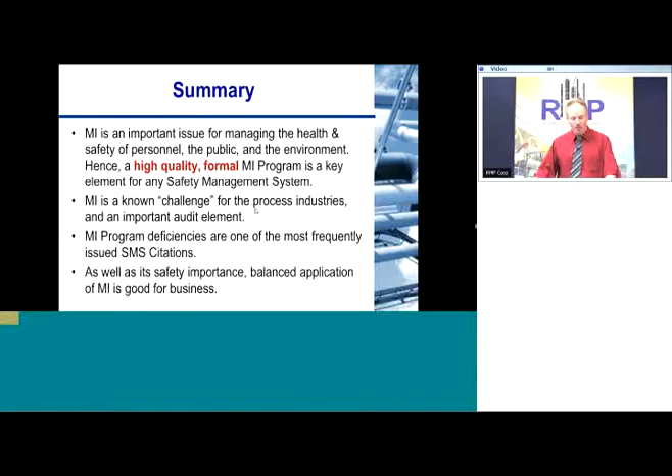So let's talk about some good news and some other resources that you've got. Now, when you look at the mechanical integrity requirements for SEMS, as I mentioned before, you saw a lot of overlap with other safety management system requirements, and it's nearly identical in terms of the concept. A lot of these are fundamental. They're almost self-evident, but they are a fundamental part of all mechanical integrity programs.

Some additional emphasis points for SEMS are consistency with manufacturers' design and material specs, training maintenance personnel to ensure that they can do the job properly to maintain equipment reliability, and also the frequencies of tests and inspections should be consistent with BSEE regulations and also industry recommended practices like things that API puts out. Modifications to equipment and systems to address their new application, that also is an emphasis point for SEMS. But the vast majority of SEMS mechanical integrity requirements are consistent with other SMS programs.

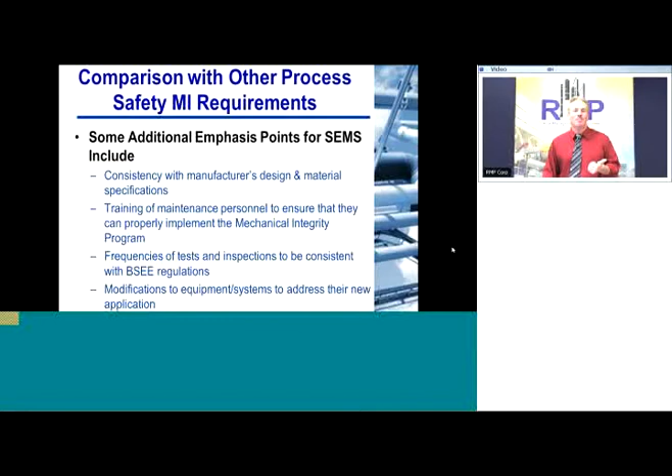So keep in mind, there's a lot to do by November 15th. We'll talk about some other things that have occurred just within the past few weeks with respect to SEMS. It's a changing landscape. It's a moving target, but there's a lot to be done by November 15th, and mechanical integrity is a key element to get on top of. The bulk of these elements are common to these other loss prevention programs, as I mentioned before.

The good news is that a lot of companies that operate offshore facilities have onshore business units that are already addressing mechanical integrity issues. They may already have CMMS software, implementation practices, procedures, and a lot of things that you can tap into, and resources, personnel in other offices in your company that may be already implementing a lot of these things.

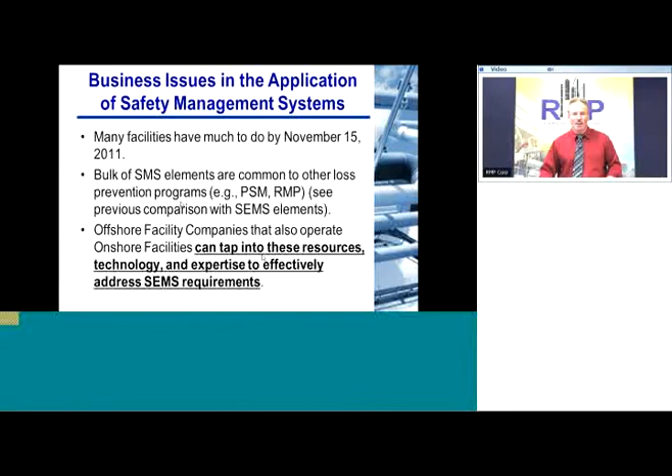So you can not only tap into those resources to help you make sure you get on top of this program, but by maintaining consistency across the corporation, you're adhering to your own best practices, and it can be a lot more efficient in terms of its implementation. So the good news is a lot of you folks already have a lot of resources that you can bring to bear on implementation of mechanical integrity.

I just encourage you to make sure you minimize duplication, use as many resources as possible from your other business units, and from success strategies that they've used for maintaining their mechanical integrity program at their sites, and work towards a unified program. It'll be easier to manage, a lot easier to implement. Start simple, taking your existing elements, what you're doing at the sites, looking at the results, look at a gap analysis, and then as necessary, update and enhance the completeness of existing analysis. Don't forget that you need to audit and monitor these programs. Very critical for ensuring their success.

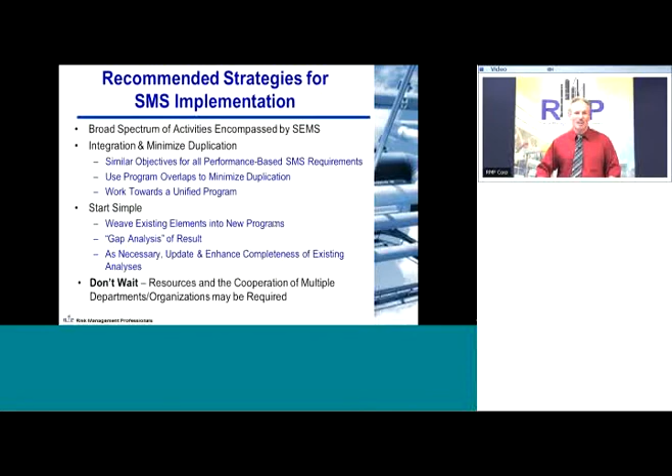And the last bullet made a lot more sense a few months ago, when we started doing these SEMS webinars back in late 2010, but right now, a lot of people are scrambling to get their programs together. Certainly, mechanical integrity is a key element.

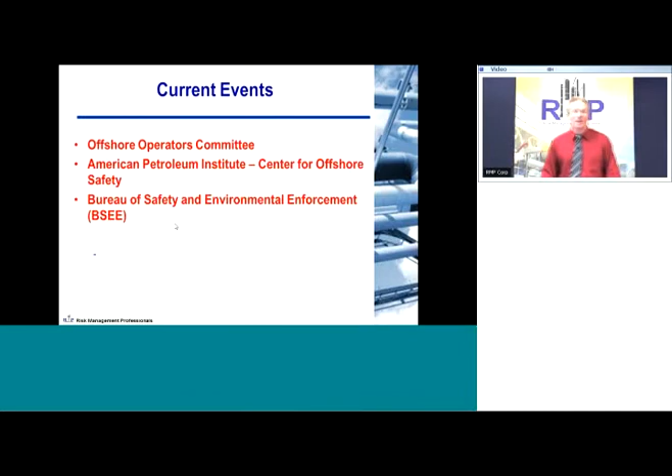Okay, so what I'd like to do for the rest of our time here is go over a lot of what's changing with respect to the regulation of SEMS for offshore facilities. I'd also like to point out some references and resources that you can use to help pull these programs together efficiently. And so what I'd like to start with is current events.

The Offshore Operators Committee has not been sitting idle. They've been putting together an audit protocol that they've released and is available to help you look for gaps in your program and make sure that you're addressing SEMS properly. Earlier this year, API put together its Center for Offshore Safety. It's meant to be a focal point of key experienced personnel that can help define good applications for offshore safety.

BSEE's been pretty busy. If you're not familiar with the term, as of October 1st, BOEMRE officially split up into two elements: BOEM, which is more the licensing end, and also BSEE, or the Bureau of Safety and Environmental Enforcement. They're the ones who are in charge of monitoring the implementation of SEMS, helping train, provide resources, and of course, auditing and enforcement at offshore facilities.

They've been pretty busy. Not only have they reorganized, there have been a lot of personnel reassigned to various training activities, etc. But they've also been putting out some supplemental regulations. There's a proposed rule that was put in the Federal Register on September 14th that provided some additional emphasis points on SEMS. The key things are stop work authority, employee participation, reporting unsafe work conditions, and they provided a lot of clarifications on two other key areas.

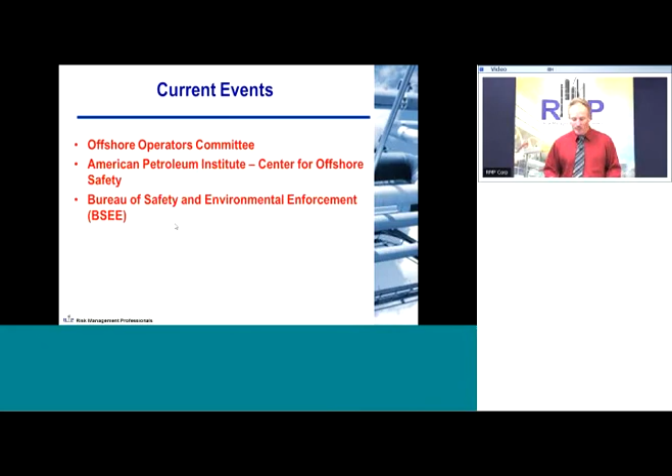For your background, and this is available off our website, we've got videos of previous webinars that we've done starting in mid-2010 to provide overviews of various process safety items, how offshore facilities have addressed it, the various techniques that are out there. We also spent some time, if you're interested in safety cases, providing some background on that. Again, all these are spin-offs from our engineering consulting activities where we've worked actively with both onshore and offshore facilities, helping them implement safety management systems.

We have a variety of topics, and when the SEMS regs came out in fall, we started providing a rotating series on how to address all the elements in a lot of the things that are happening. The hazards analysis is a key area, mechanical integrity. Basically, those key items in red, more than anything else, deserve the utmost priority. We've continued, as you see, with other webinars that provide background on these things.

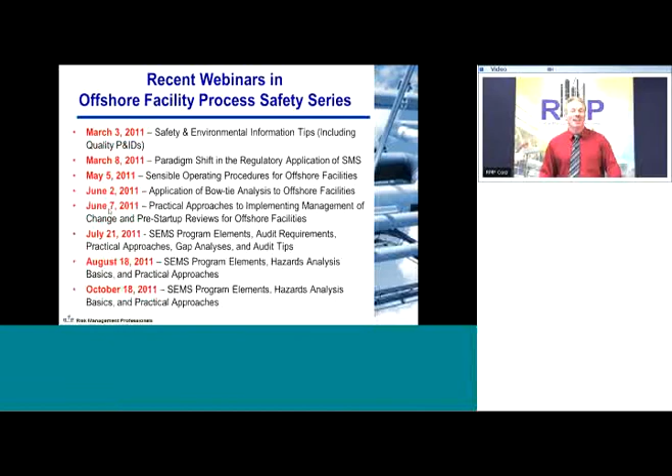We've also got some other things that are coming up. As things change, again, this is a moving target, especially since you've got another proposed rule out there that we don't know when that's going to get implemented or what sort of enforcement requirements they're going to have and implementation dates for that. But what we've got coming up on December 6th is a webinar. It's pretty exciting. There's actually some software out there that was developed in the UK called ProSaint that helps link together key operating steps. And once those steps are defined and their implications, it dovetails with the JSA and automatically gets you started on the JSA and identifies key parts of that, and also helps you craft initial operating procedures.

Pretty exciting stuff. We've also got a bow tie seminar coming up on January 24th, 25th. Now, bow ties are not required by regulation, but a lot of people have found it useful after you've done the hazards analysis and identifying key scenarios for managing those and making sure that both graphically and from an importance perspective they show up to management and stay at the top of the list with respect to training at facilities.

Upcoming webinars, again, December 6th is a freebie on ProSaint. December 8th is talking about audit techniques. For those of you who were in a rush to get your SEMS program together, this is a good time to step back early December, learn about how to use audit techniques, do a gap analysis to see if there's any problems that you can correct before somebody else finds them.